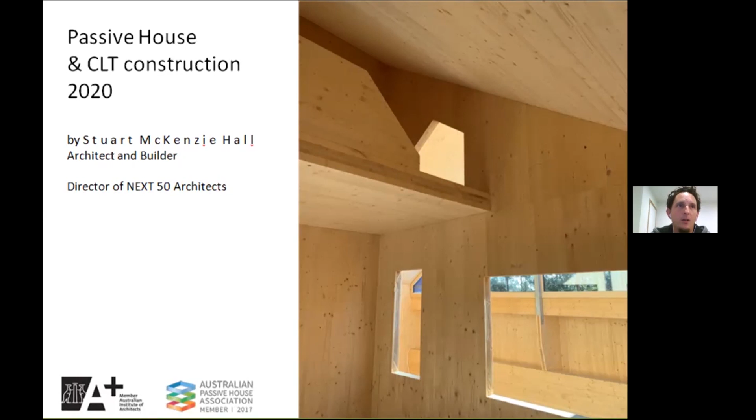So we are living in the 6th mass extinction. It's been referred to as the Holocene or the Anthropocene extinction. And that means that the background extinction rate, the normal extinction rate, is exceeded significantly. And the estimates range from 100 to 10,000 times the background extinction rate. And that's how we know scientifically that we're in the middle of an extinction event. And this is caused by human activity on this planet.

Here are the other 5 extinction events. Sorry for the doom and gloom, but I think it's important to set this context. I'm going to do it fairly briefly. So about 440 million years ago, 85% of all species were made extinct during that event. And you can see the diagrammatic way that the Earth looked in these different eras.

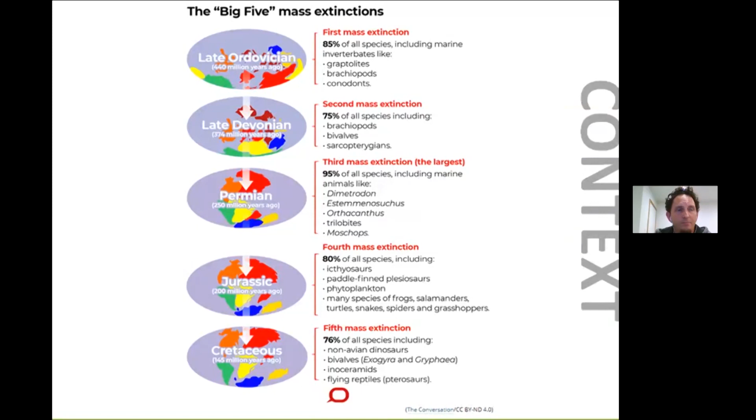145 million years ago was the 5th, 76% of all species were made extinct. So these are pretty massive events. And the fact that we're in the middle of one is worrying, to say the least. And the climate breakdown is just a part of that, a major part of it. But nonetheless, it's also related to human activity.

So putting Australia in that context, it has one of the worst recent extinction records of any continent. So more than 100 species of vertebrates since first people arrived here over 50,000 years ago. This isn't a quote, but I suspect that the majority of the extinction that's happened on the Australian continent would have happened since colonialist times. I'm pretty sure that Indigenous people would have had much more respect for the land than we do. So now we're looking at 300 animal and 1,000 plant species that are considered threatened with imminent extinction.

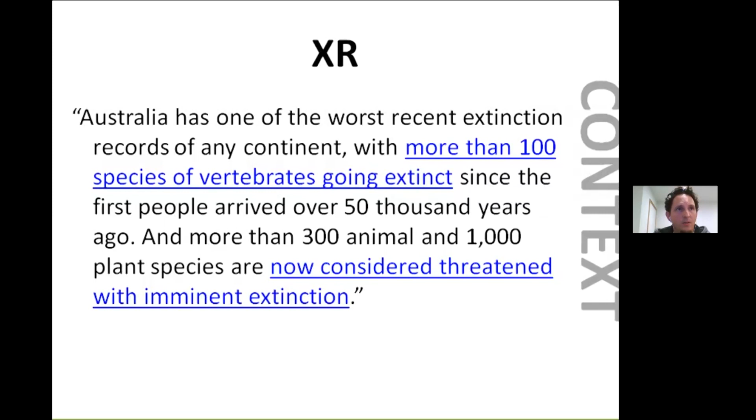So what are we going to do about all of this? This is where we're starting to get towards the end of the context discussion. This is only one aspect of the discussion, but I think this is a fascinating book, edited by Paul Hawken. If you haven't seen this before, I recommend looking at it. Drawdown, as the title suggests, is a very comprehensive plan.

And it's not a plan about theoretical ideas of what would happen if some new magic technology was invented that allowed us to use clean coal or something. This is just about scientific data on things that we're able to do right now, and then it's ranked 1 to 80 in order of efficacy. And this is important because it puts what we do with buildings and efficiency in overall context.

So I've made a quick snapshot of the top 10, and then some other interesting ones where they fit in the 1 to 80. And then these are the category totals. So let's have a quick look at these because it's quite interesting. So the number 1 individual item is just management of refrigerants. It sounds really boring, it hardly gets any media attention, but it's a very significant reduction.

These reductions, by the way, are based on the current data. For example, if we continue to roll onshore wind turbines out at the current rate, allowing some moderate scaling, we'll save 84.6 gigatons by 2050. Refrigerant management, because it has such a huge global warming potential, 89.

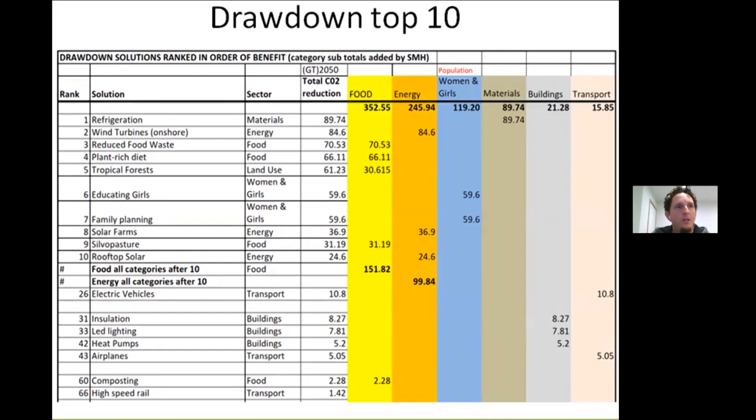So the whole of Australian suburban building systems are set up as systems. Brick veneer buildings are very much the product of an industrialized system. They don't happen inside a factory, they're not strictly prefabrication, but they are systems of a predetermined way of doing things. They're done en masse for efficiency, hence everything looks the same, which I'm not suggesting is a good thing.

But it is something that we need to be aware of when we're talking about prefabrication and the impacts that can have. I guess the other obvious analogy would be the car industry. We don't get to have bespoke vehicles, we get to select from a range that a given manufacturer would make. So if we're moving away from standard building practices and talking about CLT and passive house buildings, one of the first questions is, why timber?

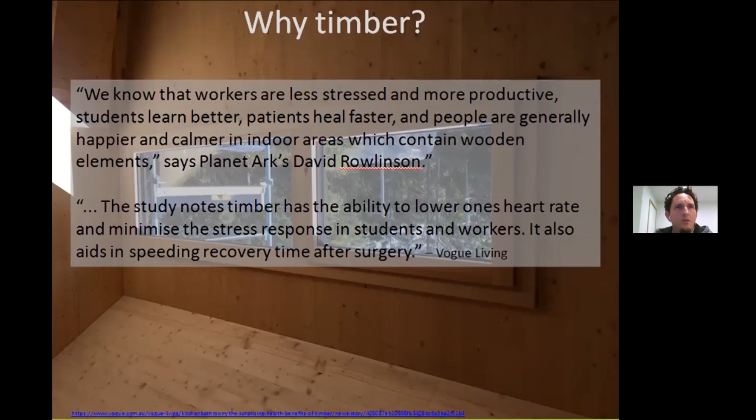And I think Passive House ties in with this quite well because there are health benefits from building a passive house, which I'm going to touch on quite a few of them tonight. So why CLT, why passive house? I'm going to use New Zealand as a little bit of a case study. There's a resource here which is excellent called Passive House for New Zealand, The Warm Healthy Homes We Need by Jason Quinn. It's a 2019 publication.

New Zealand had a problem that it identified quite some time ago, which, among other things, costs 6.16 billion a year in public and private costs because of respiratory illnesses. Respiratory illnesses caused by what was referred to as the leaky building syndrome, just generally poor quality building. So New Zealand's been a bit of a test case. The homes are cold, so the average New Zealand home is 16 degrees C during winter, which is the temperature at which respiratory illness increases, or the risk of it. At less than 12 degrees, there's a high risk of stroke and heart attacks. Now, in this study, 12 degrees and less was found inside bedrooms, typically.

The WHO, the World Health Organization guidelines call for an indoor temperature of at least 18 to 21 Celsius, particularly if babies and elderly are resident. And this is a mind-blowing statistic. 1/3 of New Zealand homes contain mold. A lot of these problems are addressed by Passive House and Passive House systems, and I'll go into that as we go through.

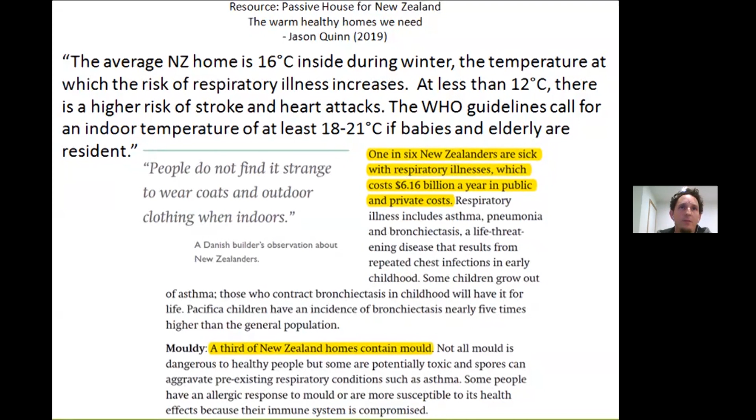Pretty much, if you visit a CLT factory, as I've done in the XLAM factory here in Albury-Wodonga on the mainland, which is pretty much a brand new facility, the timber goes in one end of the factory as a pack of pine, and it's processed almost entirely in an automated way and comes out as a fully cut and finished CLT panel at the other end without a human hand touching it. It's very fast, it's very efficient. Talk about that a bit later.

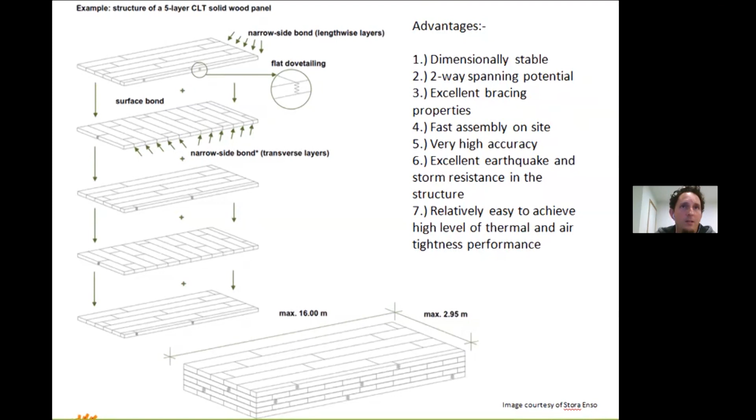So that's one of the exciting places that CLT can be advantageous. So obviously in a setting like New Zealand, it's also super useful. Not so much an issue in Australia, but just worth noting about the material itself. So that's a little bit about CLT. Let's flick back to Passivhaus. I'm going to go back and forth a little bit as we go through, just so you can see kind of the relation between the two things.

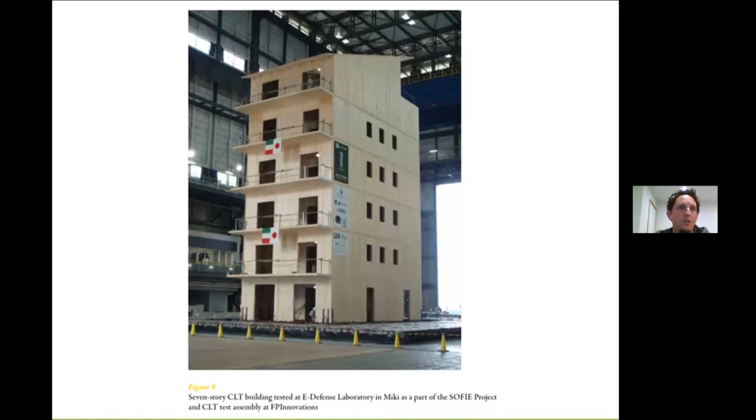So there's a bit of an overview of what Passivhaus is. And I note from the poll at the beginning, I'm pretty much preaching to the choir tonight. So a lot of people either have some knowledge of Passivhaus or are Passivhaus professionals. I apologise if I'm going over basics that people already know, but I'm trying to appeal to the widest audience possible. And I'm not going to make any assumptions with that.

So Passivhaus started in 1991. Today there are over 60,000 homes that have been built to the Passivhaus standard, and many over and above that have attempted to but are not certified. So it's not a brand new idea. This is something that's been tried and tested. It's been tested in a lot of different climates.

And essentially what it comes down to: using modelling and climate data and careful design, there's a requirement to reduce the heating and cooling total energy demand to 15 kilowatt hours for every metre squared of the building internal per year. So I'll talk about what that means in a minute in terms of actual heating costs, but it's very low. Somewhere between 80 and 90% less heating and cooling energy than a normal building.

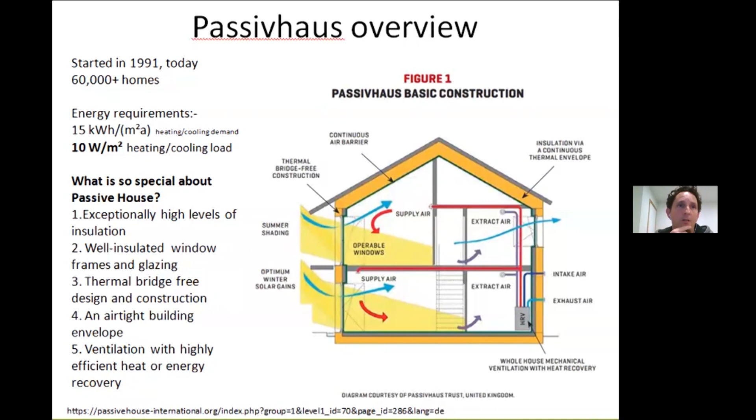And it uses a very low amount of energy, and it means that you don't have to open windows in the middle of winter. So it adds a lot to the energy efficiency. Another image of basically the same thing, diagrammatically showing the air intake and the stale air exhaust, the heat exchanger unit, supplying warm, fresh air, extracting stale air from the kitchen and from the bathrooms.

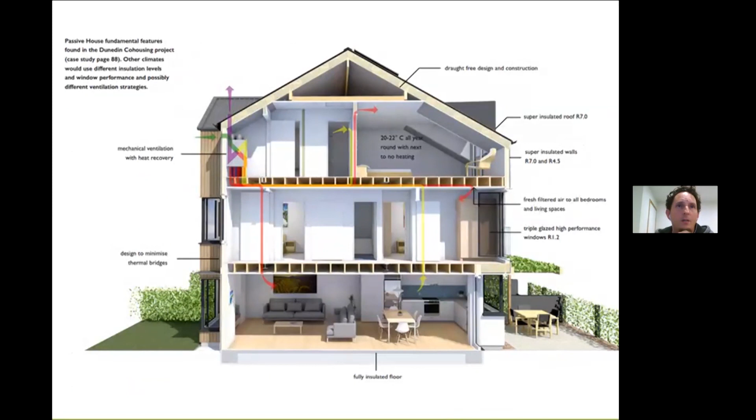So just going over some myths. Australia is too warm and Passivhaus is overkill for our climate. So this is a myth for a number of reasons. Firstly, Passivhaus is customized to the local climate. So the climate data for the specific area that you're building in, the specific altitude, is optimized and it's designed into the building at the design stage. So it's not a one size fits all system.

A building in the middle of Siberia is going to have much more energy requirements to meet Passivhaus: thicker insulation, higher performance windows, more of a reliance on thermal separation of the floor slab, and all these details will be different in a house in Siberia to a house in Victoria or Canberra. They'll share some things in common, but they'll still be different.

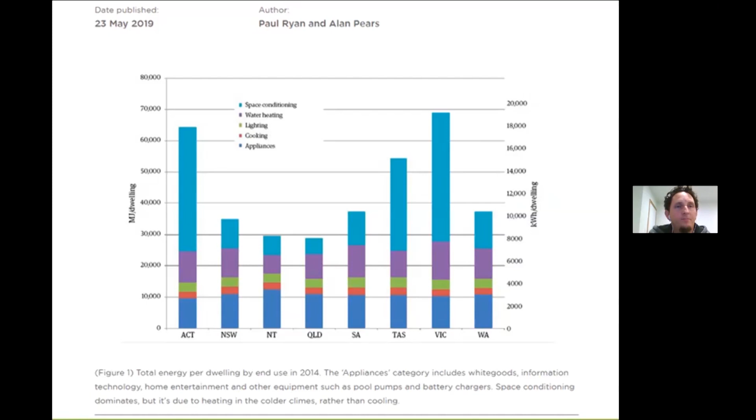So I'm going to move into the case study. This is the first passive house we did, passive house with CLT, or using passive house principles. It's not certified, but we went through the same process, which is a bit different to the case study I'm going to look at tonight. I only show this because I think you learn things from doing things previously and then trying to incorporate the learning from this first example into the next build.

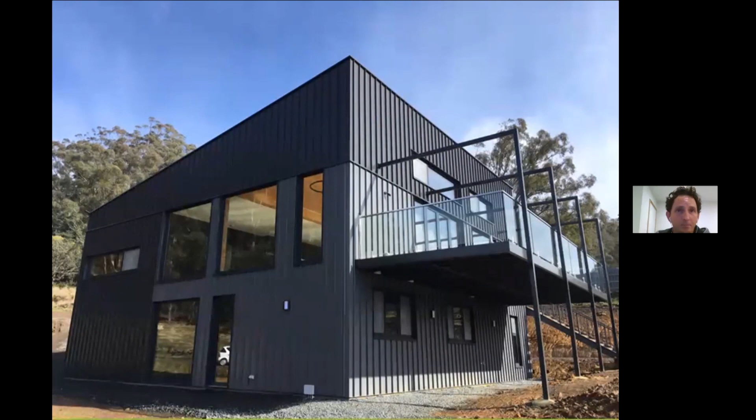So this is the interior of a passive house made from CLT in Hobart. Not a certified passive house, but built on those principles. This is the exterior. It's got metal cladding. Now I'm going to dive into the case study for tonight. So this is a shot from a couple of weeks ago with the build. I'm going to show you what it actually looks like finished in a CAD model. So this is the design intent.

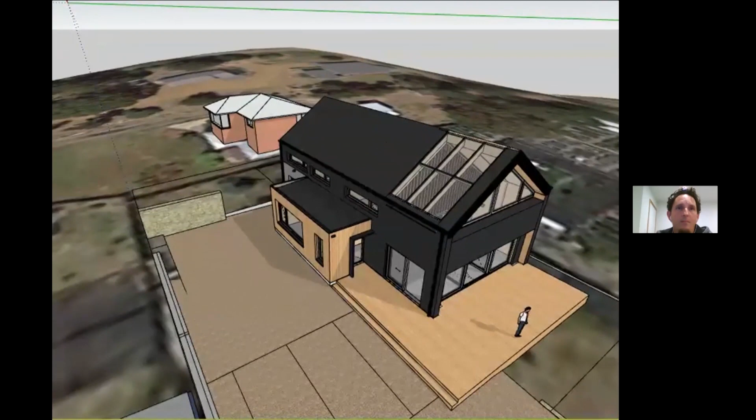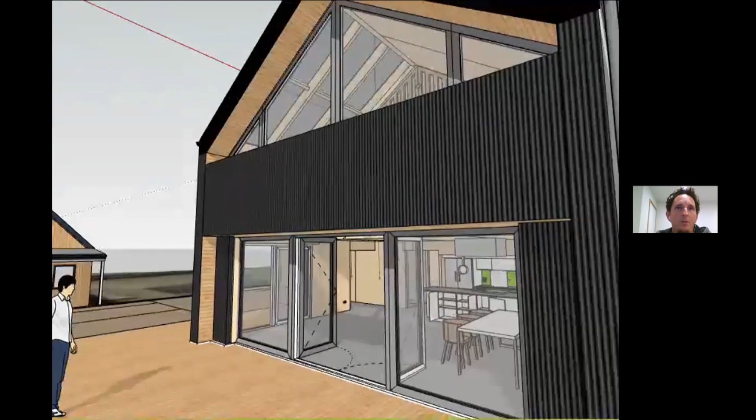This is the northern elevation we're looking at here. So it's got a fair amount of glazing on the north. And what you'll see there is a bit of an eave overhang that's kind of optimized for Tasmania to cut out that high level summer sun. Same on the bottom, so it's actually a box built into the cladding. So typical passive solar design features. Because of the block running north-south, it's actually a long building on its long axis, so obviously some of these back rooms don't get the direct northern sun. So to try and get a bit more light deeper into the building, we've got a fairly big roof light.

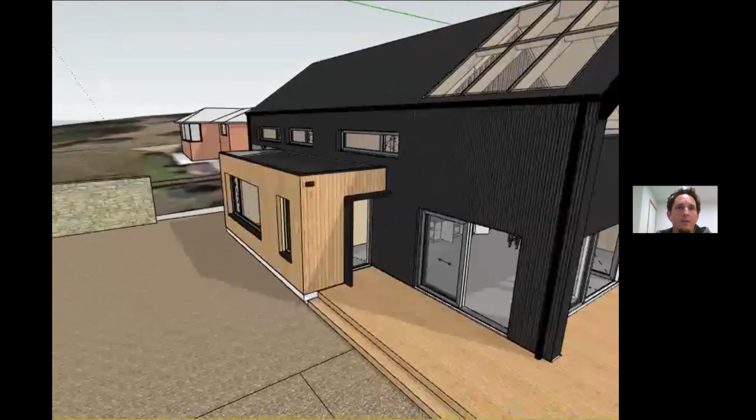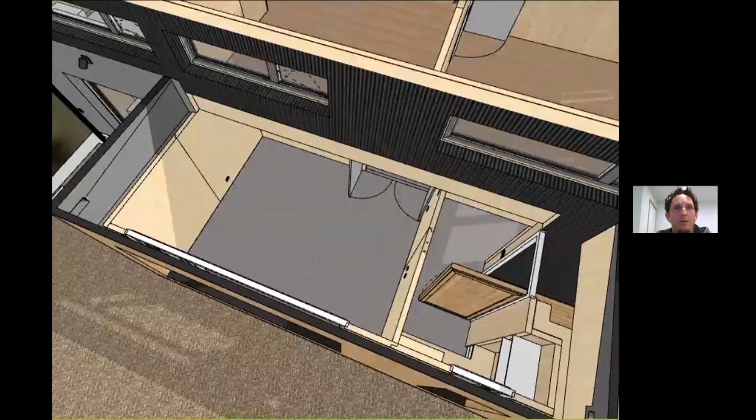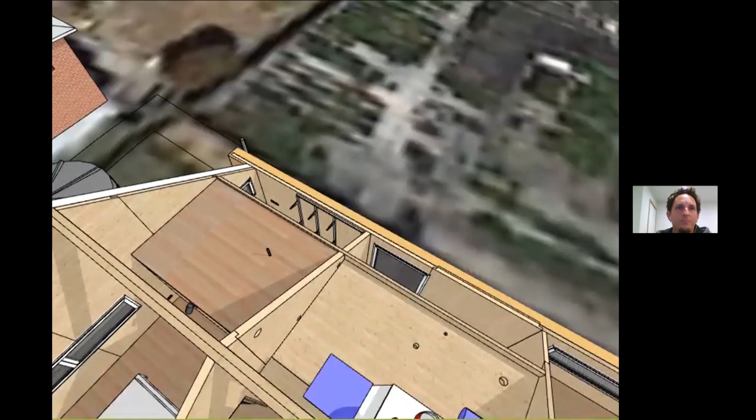And I'll show you internally what's going on so you get a bit more of an idea of the building. So there's a void here over the living dining space. There's a little entry lobby here. I'll go to the downstairs in a second. Coming up the stairs, there's a second living upstairs, which is kind of a sewing craft room. There's a master bedroom here, which has an ensuite underneath this little loft area and a walk-in robe. And there are two kids' bedrooms that have built-in bunk beds that are made in the CLT.

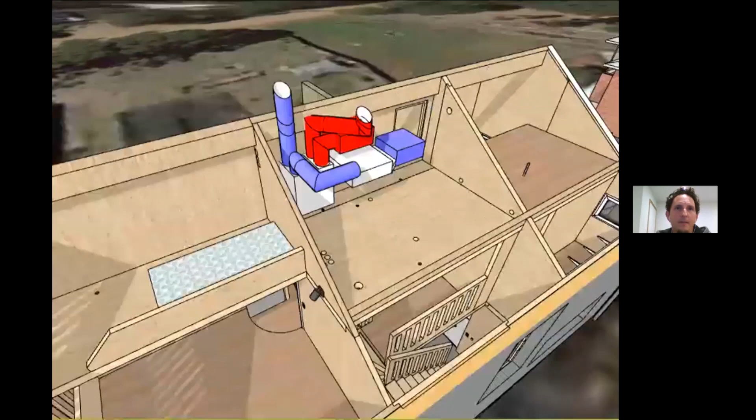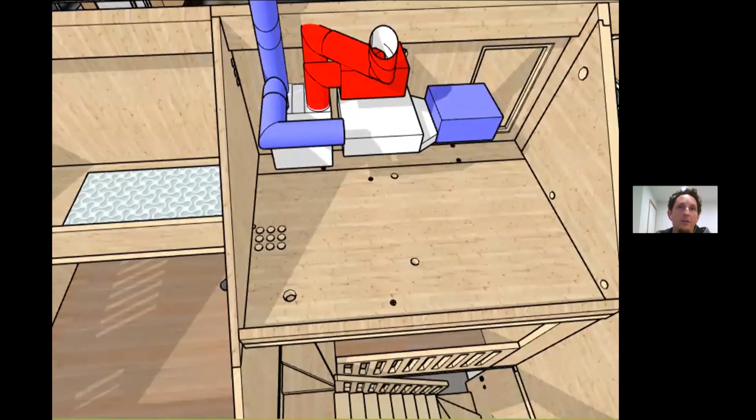So I haven't showed all the joinery in this system, but one of the reasons I'm showing you this part of the model is there's a mechanical room up here with the HRV system pre-located in it. And you can see all of these little openings in the CLT, which are predetermined. So there's predetermined downlight holes, there's predetermined openings in the CLT for the HRV. These are cut in the factory on the CNC machines. They're very accurate, and it means that we don't have to do hardly any processing on site.

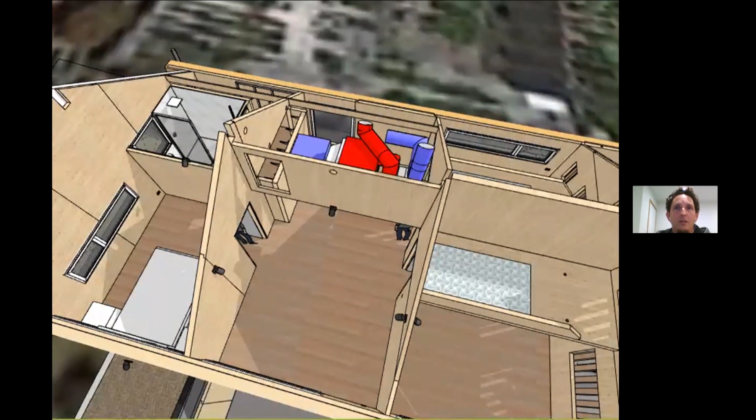So I'm just going to switch off the ceiling zone. So it shows you a bathroom, walk-in robe. So there's 3 bedrooms up here with the ensuite. Switch off that first floor so we can see what's going on downstairs. And downstairs we have the open plan kitchen, living, dining. There's a second living space, 4th bedroom, which is for an elderly parent, and the main bathroom, laundry, pantry area, and then the stairs up.

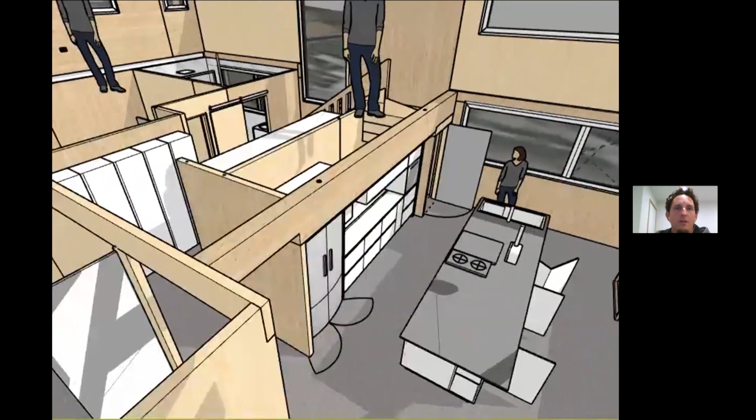Now, that's a fairly large house, but it's sort of similar to the Australian average of about 230 square meters. I think this is a bit bigger than that. It's about 280. Don't quote me on the exact square meterage. I'll have to check that.

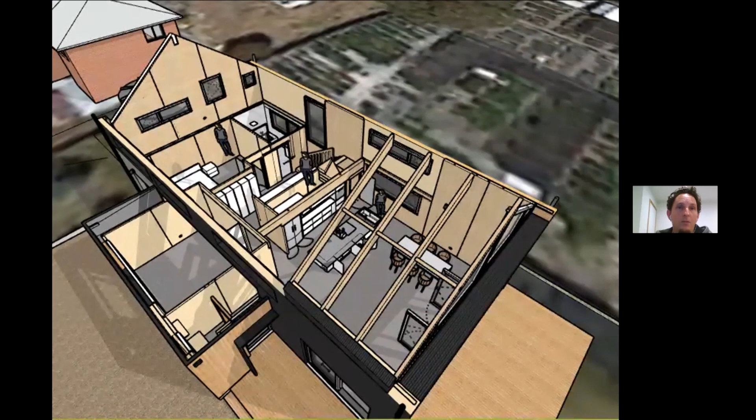But I want to show you, that was really just to give you an idea of the building, what it looks like, how the spaces are arranged, so that when you see some of the images, it'll make a little bit more sense what we've achieved with the CLT. So that gives you a bit of an overview of the building.

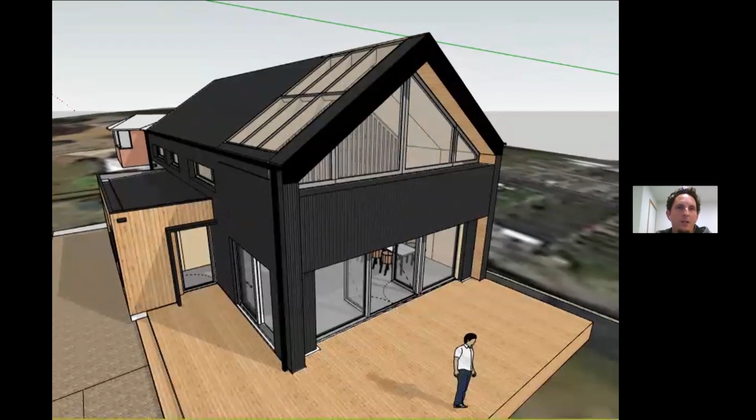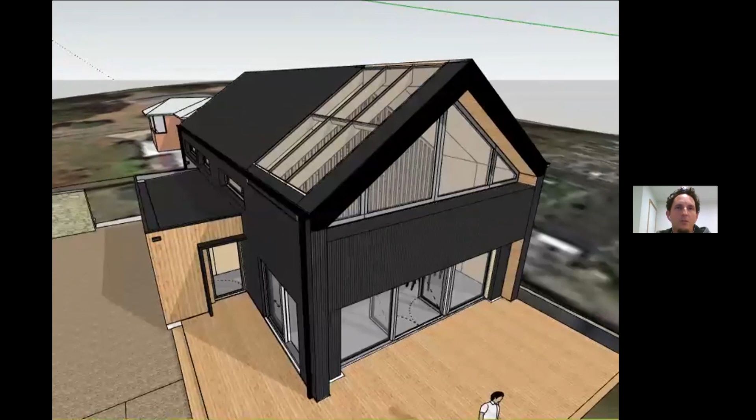So this is designed and then modelled in the Passivhaus planning package, as well as the energy rating software. A lot of the things are optimised in that process. So we look at things like we needed to add a sun protect coating to the glass in this roof, because we're getting a little bit of overheating when we were modelling it in the summer. And Passivhaus allows for some overheating, but it's to a limited degree. So there are the sort of feedback loops that you get from doing the modelling early in the build.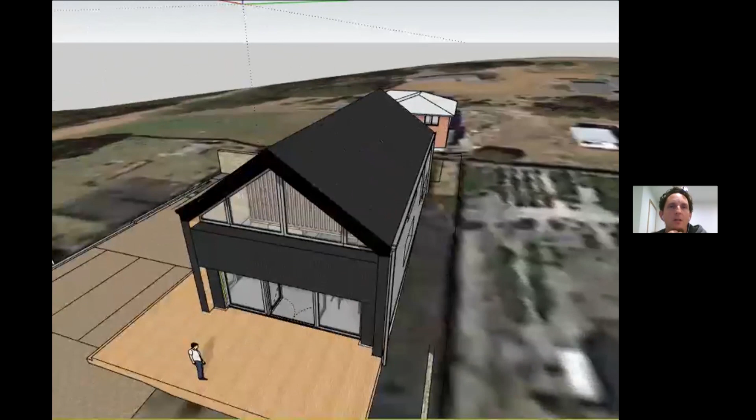Some of that feedback that comes through the Passivhaus planning package modelling is much more specific than what you get from the energy rating software feedback. You do get some useful things out of the energy rating process, the star rating process that's mandatory, but that also depends a little bit on your consultant. The consultant we have is very experienced and is able to interrogate that star rating model in quite a useful way.

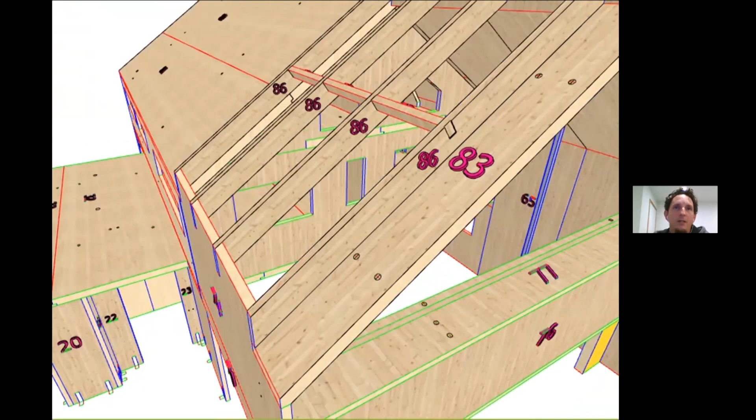So now that's the finished building. The CLT skeleton underneath it is basically like this. So as we design the building, each panel has a sequence number so that we know in what order those panels go up. That's all planned from the beginning. The lifting points are planned into the panel. Things like recesses for these purlins or cross purlins.

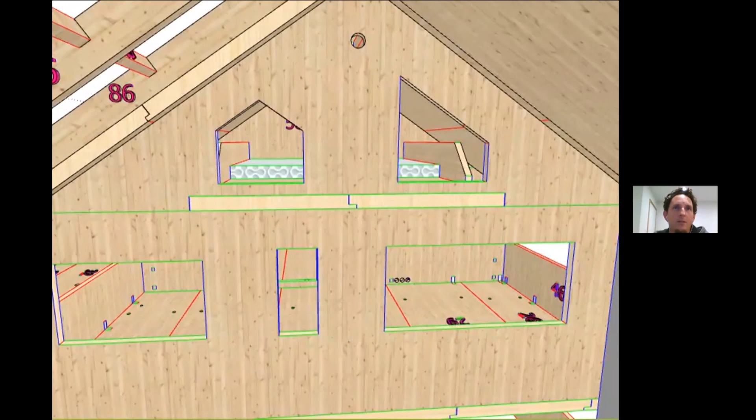A lot of detail goes into this phase, including, as I was mentioning, the integration of CLT HRV holes for the HRV system. So that's an extract point. Obviously, we're going to have a lot of heat in the top of the void space here. The heat's going to rise to the top of the space. It's going to be extracted from this point and then distributed more evenly through the house.

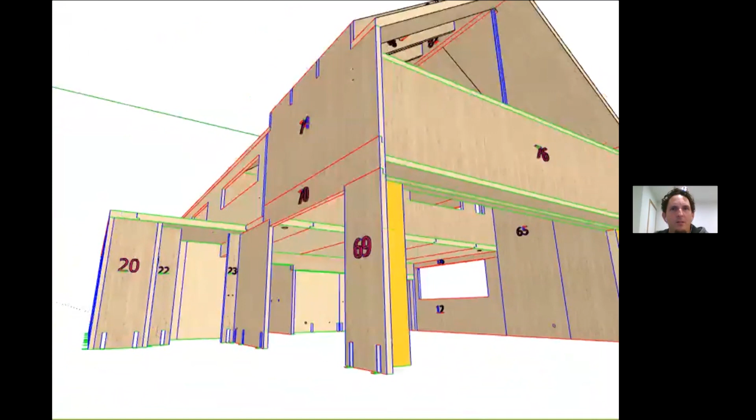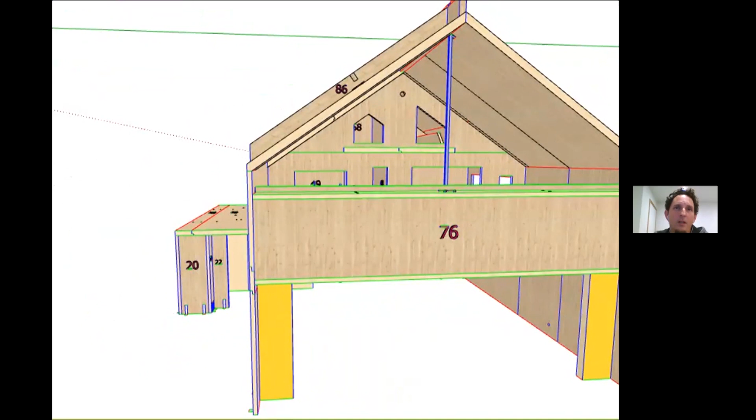The other thing that's done in the CLT model is outlets, so electrical points, some holes for plumbing and a few other details, so that when this turns up to site, the building, once it's erected to this point, the structure is complete. Also, all of the internal linings are complete. So with the exception of the floor finishes, the ceilings are CLT, the wall finishes are CLT, and there's no more work to be done then other than painting.

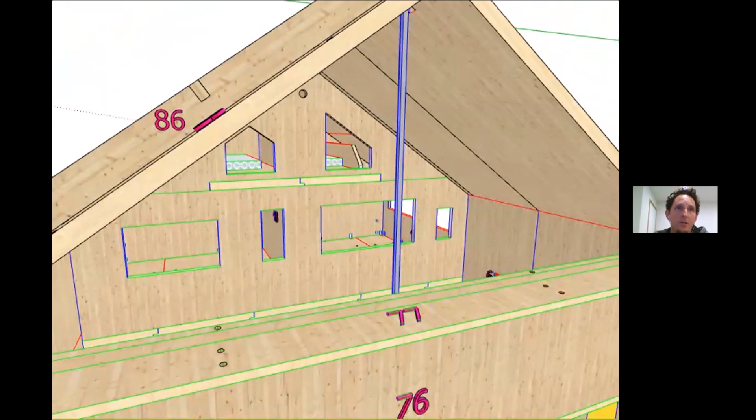So all of the panels on a CLT project are lifted into place by crane. The weight of a timber panel like that is about a quarter of the weight of concrete, so you get away with a much smaller crane, but it's still a crane-dependent process. But the reality is that means this wall goes into place pretty quickly and efficiently and accurately. Once it's fixed off, it's pretty much millimetre perfect.

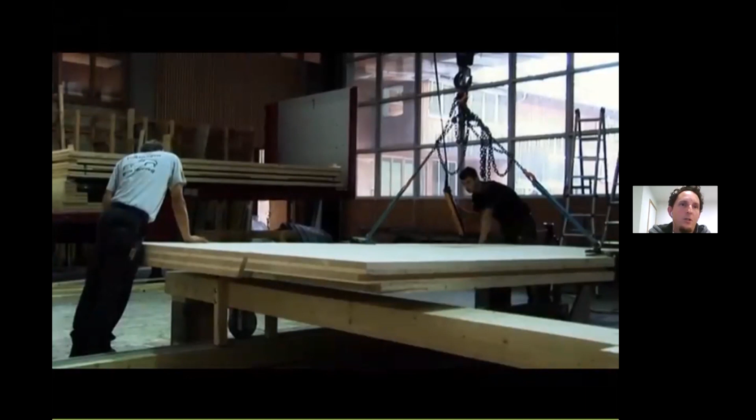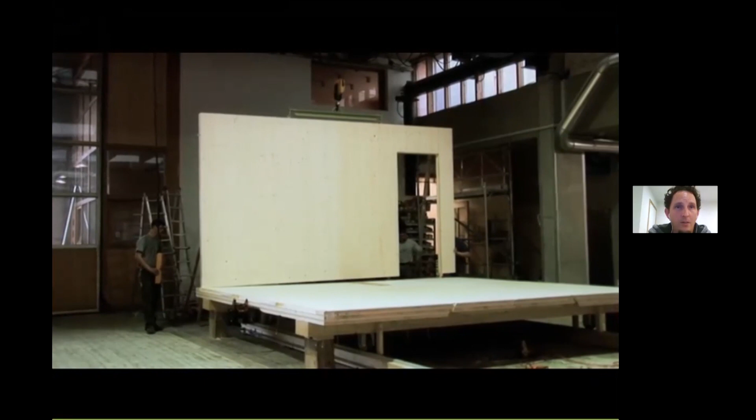That's that panel in position. So I'm going to show you another very brief section of a video, just watching a CLT. This is a CLT module that's being put together in a prefabrication facility. This is not done on site. There's the CLT, sort of a diagrammatic explanation of CLT, the different lamellas in the different directions. They're putting screws into the panels, which is how they're fixed together.

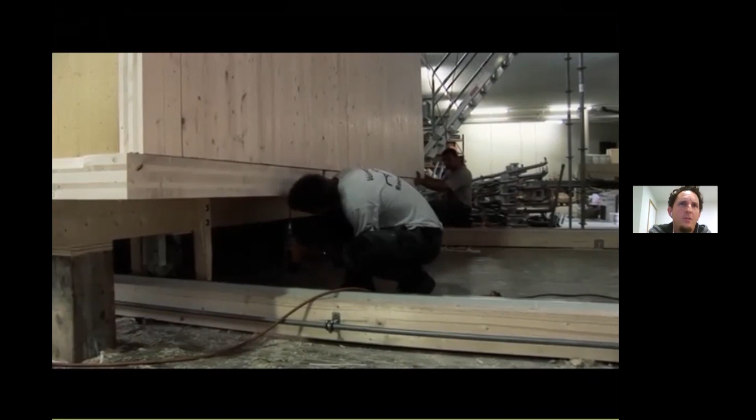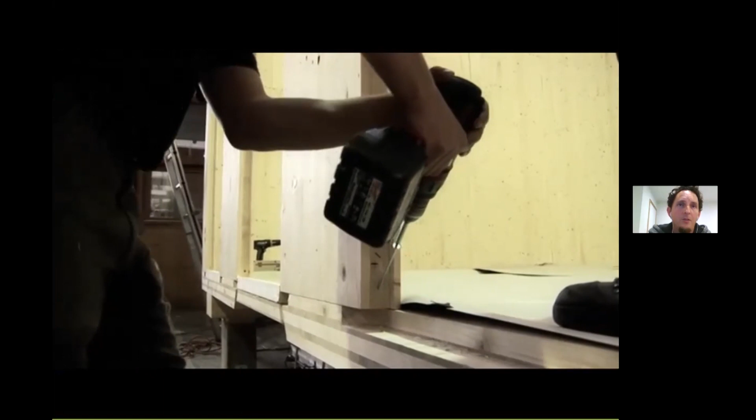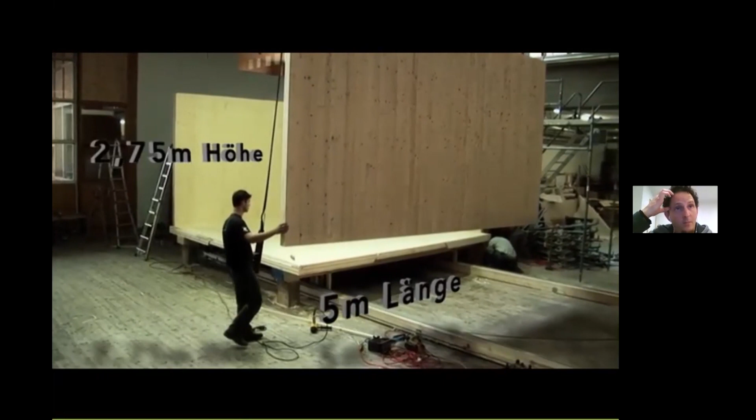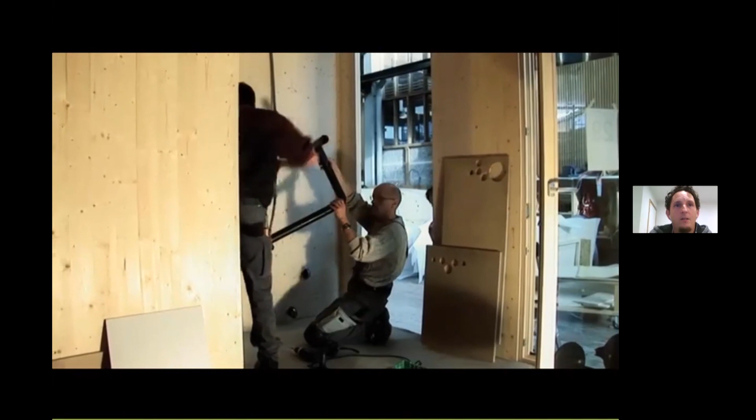This is from a 500 bedroom hotel in a pretty harsh climate in Germany. That was not just made in CLT in the factory, but then the pods were pretty much completely finished, so that when they were taken to site, they were already fitted out. A little bit different to what we're doing, but I just wanted to show you that because it gives you an idea of, that's then putting in electrical cables, pretty much how quickly it goes together. They've done the same thing that we had with predetermined electrical points and fixture points.

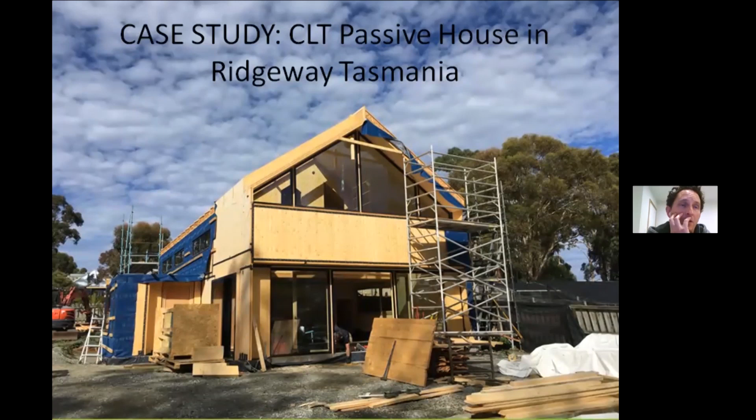So going back to our case study then, you can see now an image of the building as it's under construction. It's still under construction at the moment, but I want to show you some interesting shots later into how it's developed. That's inside that void space. This is the pop-out box here I was talking about that provides the shading. These are German triple glazed windows.

So part of that Passivhaus building envelope is to have very energy efficient windows and doors. And these are timber frame with an aluminium cladding on the exterior, triple glazed with a very good U value, and a triple glazed skylight. But you can see the CLT even includes the rafters, it's all housed in, all of that work is done. So you have a very finished building very quickly.

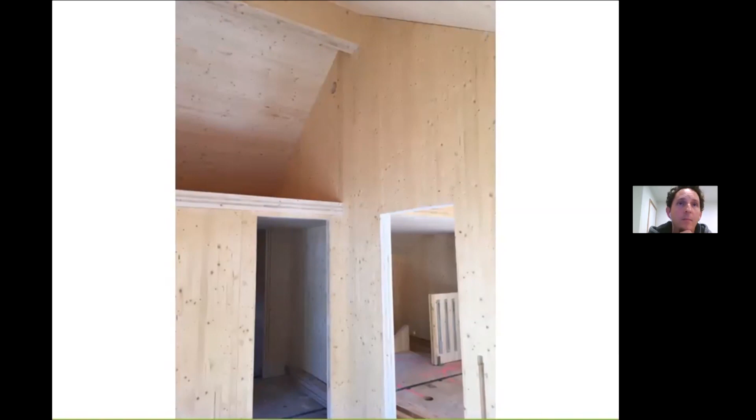This is one of the upstairs bedroom areas. So this is actually the master bedroom, and this is a little loft up here. You can see the hole there for the HRV system. You can also see in the background through in the other room, there is a balustrade which already has some slots cut in. This is all done on the CNC machine as well, done in CLT. And you can see the brackets that tie it down. I'll show you how these are hidden a bit later on.

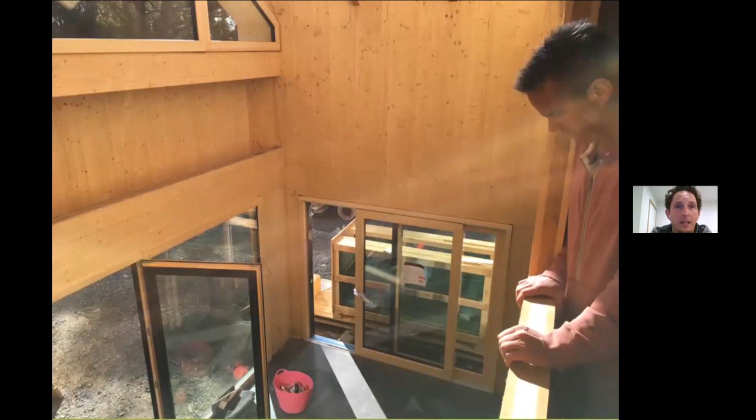This is Justin O'Connor, the builder, in the void looking down. This is a slab on ground. I'll show you the details of that later. It's a completely thermally isolated slab, dark in color and polished so that it absorbs the heat from the sun.

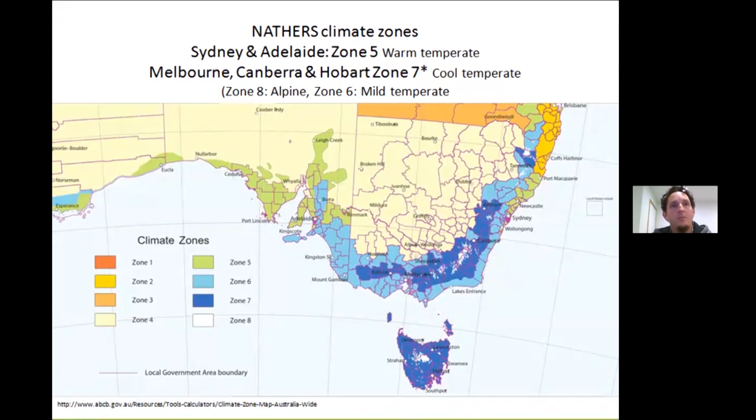So just very quickly, I'm going to do a very slight digression onto the climate zone. So you see these dark blue and light blue areas all through southeastern Australia and Tasmania. These are all cool temperate, mild temperate zones, and it's even fairly far up into New South Wales. These are all areas where we benefit from Passivhaus, and Passivhaus can also be used in hot climates. So they build them in the Middle East. So just because it's a hot climate doesn't mean you can't benefit from a thermally controlled envelope.

In Hobart, during winter, overnight temperatures can drop as low as 3. We're in a microclimate in Ridgeway, so we're up at about 350 meters, I think. So that takes another 2 degrees off, so you're getting overnight temperatures of close to 0. And depending on microclimates, you'll have areas where you'll definitely get frost.

So I just want to talk a little bit more about a review of the standard and what we're talking about, and then I'll go into the specifics. So one of the important things here, air tightness, 0.6 air changes per hour, pressurized at 50 pascals. I'm going to go into that a little bit more.

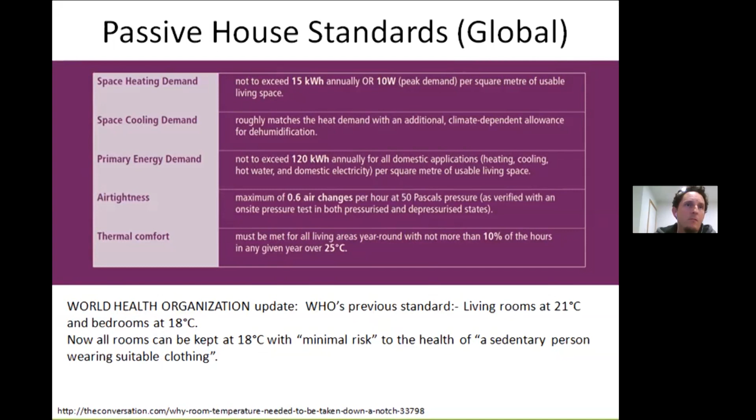I'm definitely anticipating that there'll be some questions about Passivhaus costs. So this is just one reference I found, 5 to 10% more to build than a conventional equivalent, which is quickly offset by the dramatically lower running costs.

We're finding in an architectural build, this building for example that we're looking at in the case study, is actually not more expensive than an equivalent architectural building that would be bespoke, designed by an architect, built in the same city with none of the provisions of Passivhaus. So in some cases it's cheaper, because a high spec build with high finishes will be more expensive than this building.

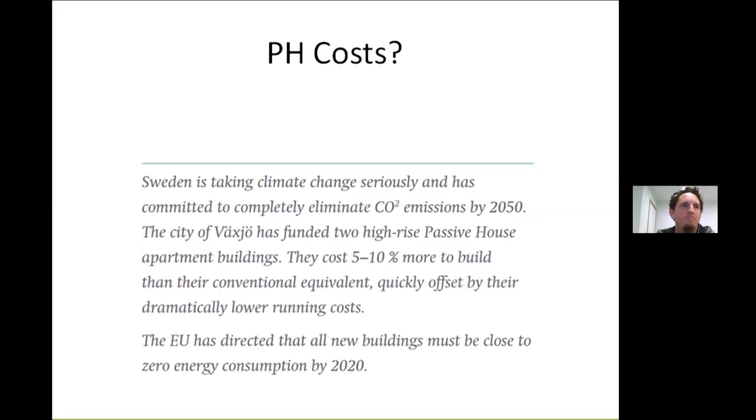So part of what offsets cost, obviously, is that you keep that heating below the magic 15 kilowatt hours per meter squared per annum. So these are your losses, these are your gains. If they equal out, then you're doing pretty well. So you get a balance. So you're going to get a significant amount of loss just through the building envelope.

You're going to get a very large amount of losses through the windows and doors. And then you're going to get some ventilation losses. And these are mitigated a bit by the use of a heat recovery ventilation system, as I mentioned. So that's your losses. In your gains, you're going to have some gains from heating, but you're going to keep those below that limit. And I'll talk about some anecdotal evidence with heating now, actually. So the house that I live in is designed to the Passivhaus standard.

It doesn't face the right way because of the peculiarities of the site. And if I work out my house at 15 kilowatt hours per meter squared per annum, it comes up to allowing me running a small 1.8 kilowatt heater, just a tiny little fan heater. That would allow me to run that heater for almost 2,000 hours in a year.

Well, anecdotally, I would say I would run it between 100 and 200 hours maximum. So it's significantly less than this 15 kilowatt hour requirement, and it's still a very comfortable house. And that's about $50 of heating energy for a whole year, which is nothing.

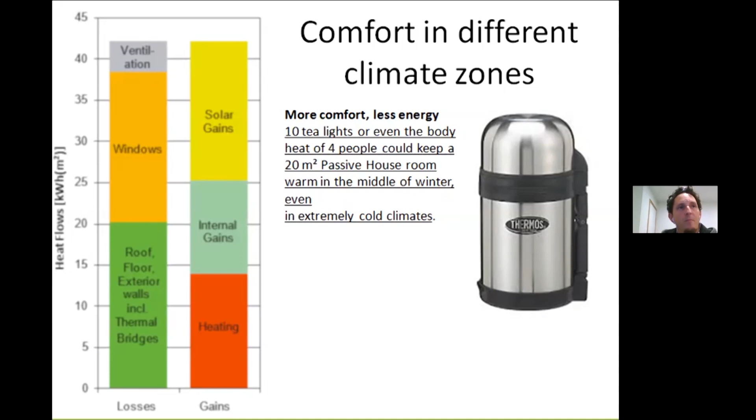So we're going to talk a little bit more about the Passivhaus planning package, PHPP. So whenever you want to design a Passivhaus, you have to use this modeling software, and you input all of the specifics, the climate specifics, the shape and geometry of the building, and then all of the specifics around the glazing installation and the values of the insulation, etc. It's very detailed.

And then it gives you some interactive data where you can play with, for example, increasing or decreasing your shading to optimize the heating and cooling loads. You can look at playing with your ventilation rates. There's all sorts of things that you can do. But this is how we locally adapt to the specific site and climate that we're designing for.

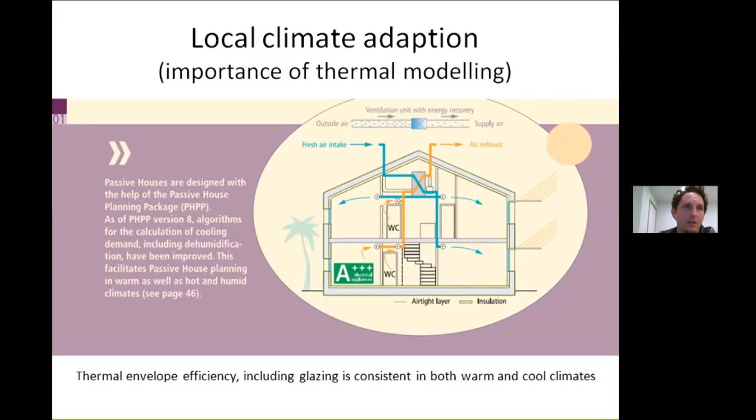So looking at air tightness as one of those key ways of achieving this great thermal efficiency. This is an example of a pressure test or a blower door test. We have to achieve 0.6 or around about half an air change per hour at 50 pascals. So 0.6 and less meets the Passivhaus standard.

To give you an example of what that means comparatively, an average house in Australia, if it's really well built and a new build, it might get 5 air changes per hour, and there are plenty that have 20 air changes and above. The general standard of air tightness in Australia is shockingly bad. It's just not really considered.

So this is a pressure test that you see here. So essentially they open a door, through the front door or wherever, insert this blower door test mechanism, which is pretty much just canvas on a frame with a fan that's calibrated to some pressure testing software and devices in the laptop to give you a readout. And I'll show you the result that we got with our CLT house.

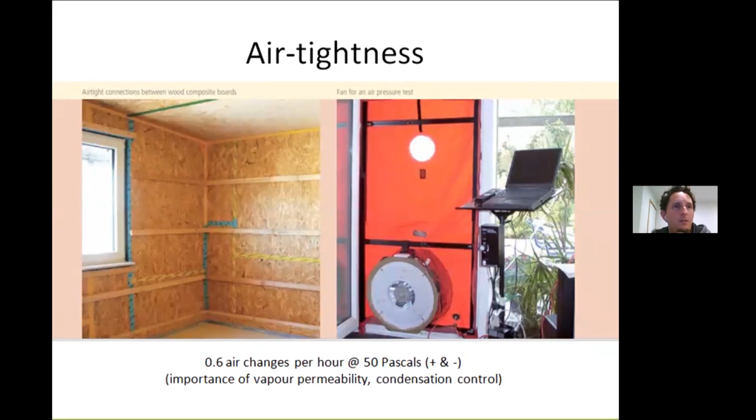So the N50 refers to the 50 pascals. It's both pressurized and depressurized, and then there's a whole heap of readings that have to happen till that is calculated. It's based on the volume of the air in the house, and there's a lot of detail that goes into setting up this. So we achieved 0.17, which is a very, very airtight building.

When I say we, I really mean Justin O'Connor, the builder. He's had prior experience in Passivhaus. He's a certified Passivhaus tradesperson and consultant. He knows a lot about the field. He was very nervous about this particular test because he'd never done a CLT house before, but he'd done other buildings with blower door tests and with air tightness, air leakage control layers. And CLT doesn't have a typical air leakage control layer, which I'll talk about in a sec.

I've been talking for about 50 minutes. I'm going to be wrapping this up pretty soon and opening up to a panel discussion, but I'm just going to try and get a little bit more detail in the end of this discussion so we understand some of these points in a bit more detail.

So right after this test was completed, this was a preliminary test. This was without a roof or cladding on it. It's just the CLT up. It was wrapped and taped. The windows were installed and taped. And then he achieved this phenomenal preliminary result.

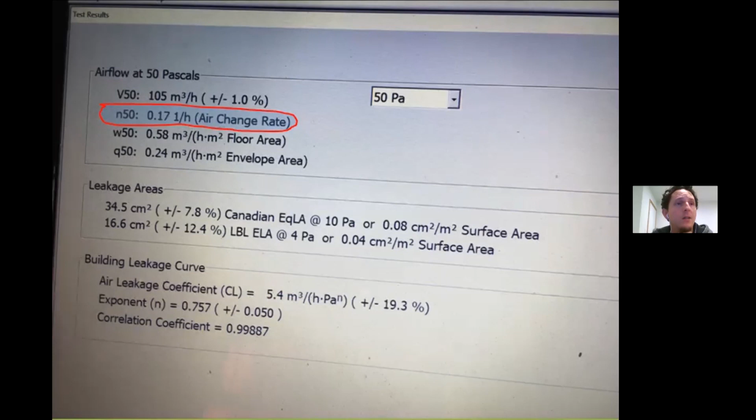How is that achieved? So there are some details here. I'm going to start from the bottom and just go around the building. This is the slab on ground. It's quite thick because there's no footing. There's some special slab prep. So the dispersive soil was removed, FCR was packed down and tested for compactness and made very flat.

And then we've got extruded polystyrene foam, well, not a high density, but a high strength foam rated to 300 kPa, so it can support a slab and building load. So there's literally no ties anywhere to the ground. This slab is completely encased in a thermally efficient insulation. It's 50 mil under, and I think we actually used 50 mil PIR on the edge in the end because it had a high enough R value.

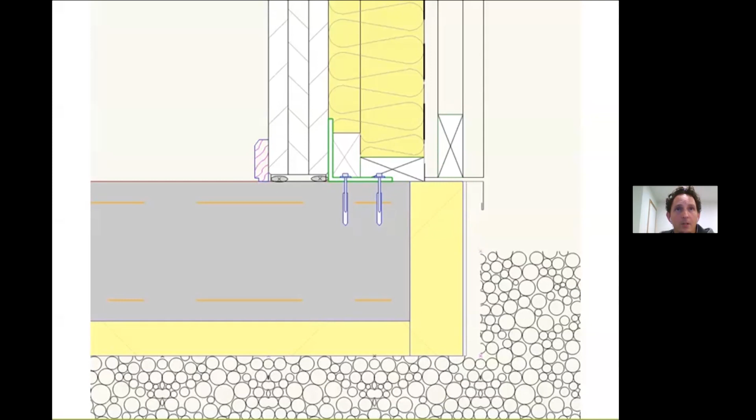And then this is the insulation zone. There's some service cavity in here, but it's also in the insulation zone. So we've got about 135 mil of insulation with a zone where services can run and still have at least 90 mil of continuous insulation. There's a membrane, which is a weather tightness layer, a rear ventilation cavity, batten, and then cladding. So that's the foot of the building, if you like.

As we go up the wall, that insulation layer continues up. We've got our CLT, which is pre-cut to the sizes for these renovation profile triple glazed windows, which have this rebate. So they just fit straight into the hole with the little air tightness tape that was put right here before the window was fitted. They're fixed from the outside, and this little red tape flap is a Pro Clima tape that wraps continuously into the membrane. So once this is fitted in the hole, it's completely finished from the inside. There's no more finishing to do on the reveal.

So technically speaking, there's a small thermal bridge through here, which has been modeled in the Passivhaus Planning Package, but it's still timber, so still pretty well insulated. And there's some expanding foam tapes in here that provide some insulation at these weak points.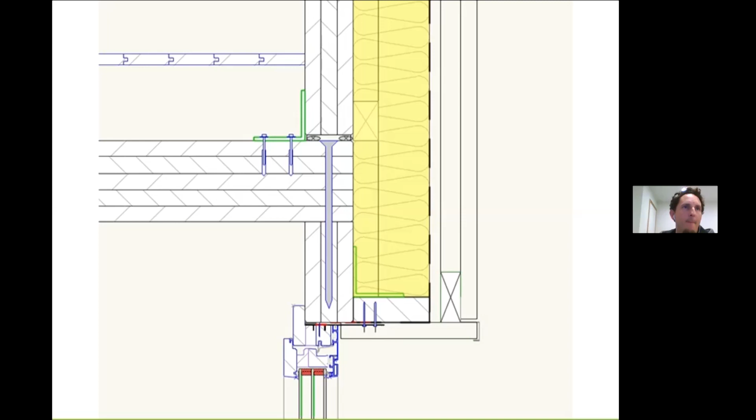This is the junction with the roof. So thick insulation on the roof. I think we had R6 in here. And on average, at the very least, in the weakest point, you get R2.6 in the wall, and you've got about 0.9 R value in the CLT. And then if you have it all entirely insulated, where there are no services, you're getting close to R3 here and about 0.9 there. So pretty high R values all around.

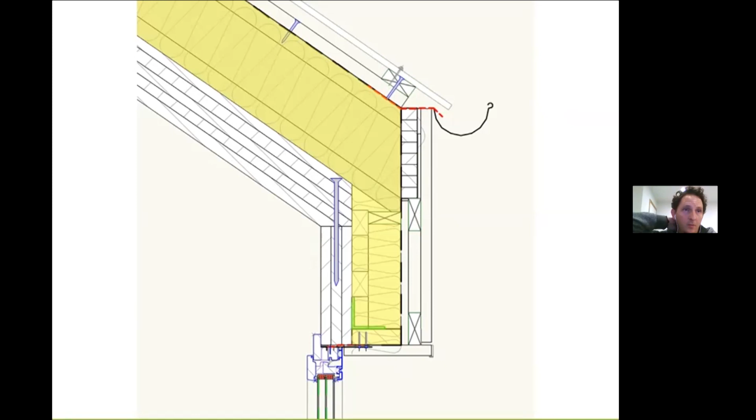Just the CLT alone in the roof at that thickness is over R1, and then you've got your R6, so you've got at least an R7 roof. Rear ventilation cavities again, continuous membrane all the way around, and a little flap into the gutter, which is added later, which is a little bit non-typical in Australian detailing. And then this is the ridge just showing how the insulation continues over. So we used I-joists on top of the CLT just to create a 250 or 240 cavity for the R6 insulation.

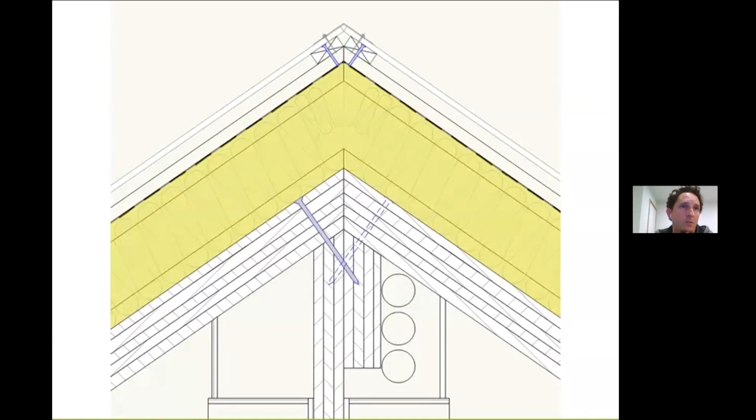So I'm going to wrap up with a couple more images of the building, so some of these details will make sense in a visual sense. But why do we do this? It's because if you do it with the appropriate insulation, thermal breaks and high quality windows, the internal surfaces have a much higher temperature than a normal building. In fact, in a passive house, if the air is 20 degrees inside, none of the surfaces will be more than 4 degrees less than that 20 degrees.

Whereas in a typical standard build, you'll have a cold window, you'll have drafts created by that, increased air leakage rates, so you're going to have radiant losses and convection losses and all sorts of losses that you don't have in a more controlled environment. And all this warmth that's been kept inside in winter is being recycled effectively by the HRV system.

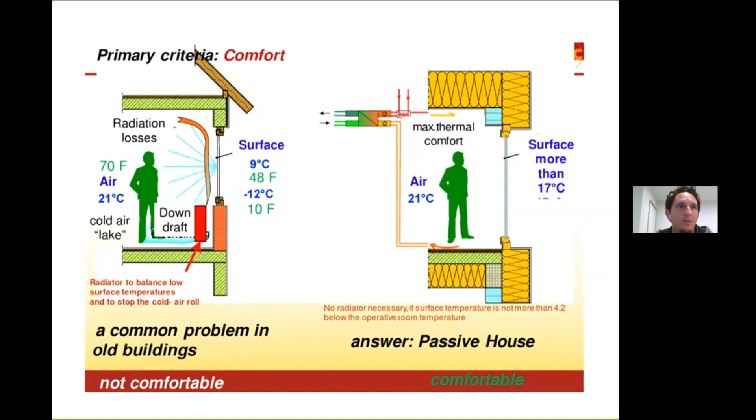This is what it looks like on the roof at this exact same day. So it's got its wrap on. There's the rear ventilation cavity created by these longitudinal battens. Pro Clima wrap with the special tapes underneath, Naideck tape underneath the counter battens. All taped and continuous into the wall membrane.

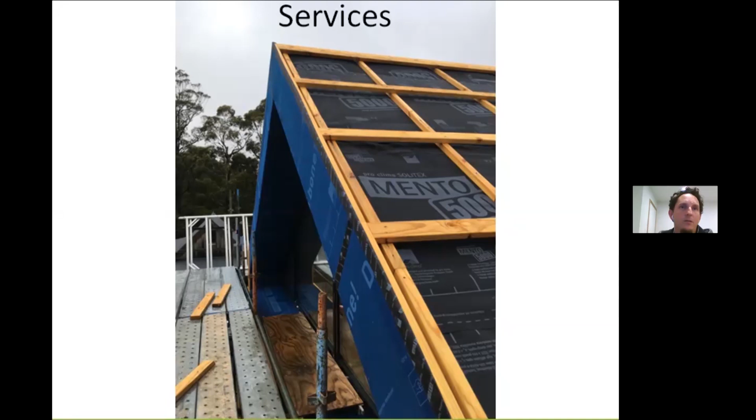At the same time, bathrooms are fully tiled already. Everything's solid too. Everywhere you go, you've got a solid substrate, so you can fix joinery wherever you want. It's super flexible. This is joinery going in. This is just an example of that skylight. It's been flashed and made watertight, ready for the roofer to do the final installation of the roof cladding.

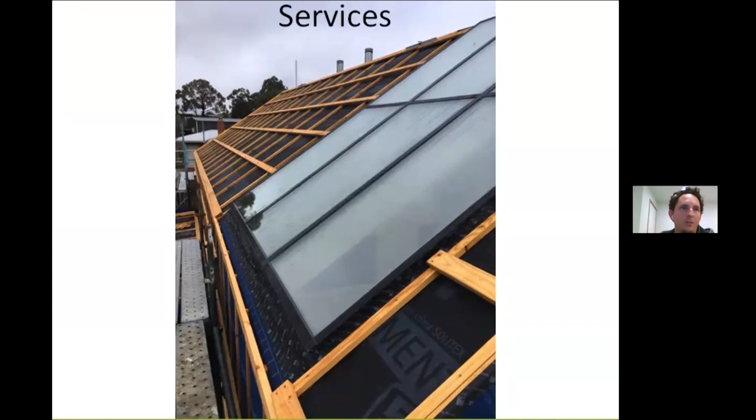This is a bit of a grey, rainy day in Tassie, and you've got a building that's weather tight without actually having any cladding or roofing on, so the guys can work inside. So even on a grey day, you get a lot of natural light. This will have battening, as you probably saw in the model, to cover these different openings from the kids' bedrooms and the bunk beds.

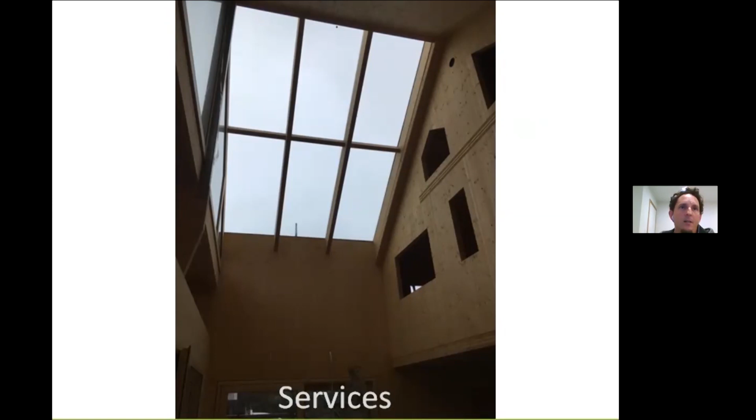So with all of this attention to detail and thermally efficient building, it means that you can have a building where it's 21 Celsius inside and minus 14 outside, and there'll be a nice even temperature distribution in the rooms. And there'll be no condensation on the inside. All the condensation will be on the outside. So this is an example in Hobart.

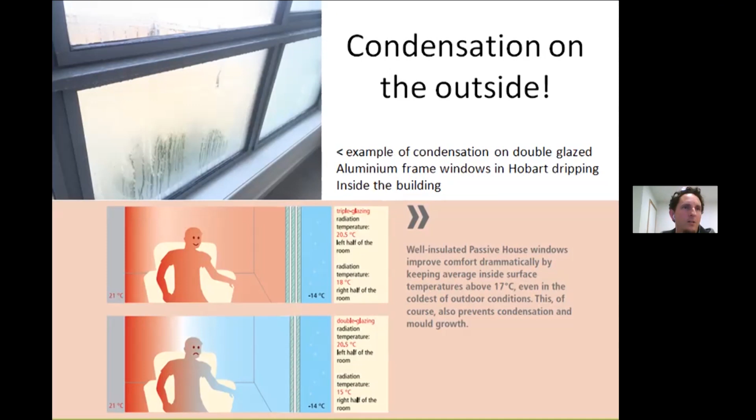It's actually one of Justin's previous houses to build: dripping condensation on double glazing with a non-thermally broken aluminium frame. And this will lead to mold and then respiratory illness, all those things that we know about from the New Zealand case studies. And you'll get uneven temperatures. So this double glazed panel will be cold, and you'll get this unevenness, you'll feel draftiness and cold. That will not happen in a passive house. It goes right into the detail, even if you look at this, it's quite interesting.

So this is pretty much my last slide actually before we go to questions. We're just bang on an hour.

An aluminium spacer on double glazing. And look at the outside temperature, minus 10, 20 C inside. So that's the case for all these different windows. This is just showing you how important detail is in the passive house system. So with an aluminium spacer, you get condensate.

And you can see the actual conductivity value of that edge spacer. So we're getting down to a detail of talking about the spacer that separates double glazing and how to specify that. Stainless steel spacers in a triple glazed window still create a thermal bridge through here, and you get condensation. That's a very efficient window frame. Timber with aluminium cladding, a good triple glazed window with a poor performing edge spacer. Even a slightly better one and still getting mold.

Then when you actually do what's called a Swiss spacer or an insulated edge spacer, which has a much better conductivity value, lower being better R value effectively, you don't get any mold, any condensation. So these are the sort of details that are going to be considered in a passive house.

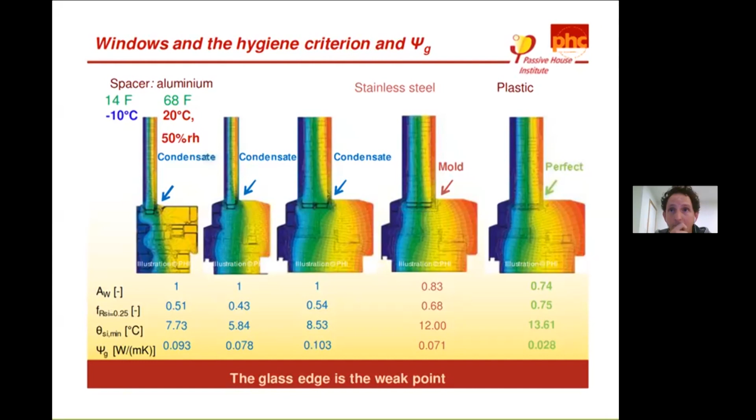So I might just finish with a few acknowledgements. And these are useful for when this video goes online so that people can contact the different people involved in the project. So Justin O'Connor was the builder and still is. And I highly recommend him. He's just been amazing and does an incredible job, super quality conscious, very knowledgeable, and just a great planner. And considering it was his first build with CLT, he just did an incredible job.

People that are interested in mass timber construction for different projects, there's a free service called Wood Solutions, and Paolo, I mentioned him earlier, he's the Italian CLT engineer. You can speak to him at woodsolutions.com.au. They provide free advice when you're interested in doing a mass timber building, like a CLT construction.

In Tassie, we use Paul Clayway from Building Evaluate to do the energy ratings, the star ratings. This building had over a 9-star rating, but I guess that's not really important other than giving us an indication of performance. What was really important is the modeling. But Paul also does blower door tests and has a thermal imaging camera and has a broad range of knowledge and expertise. So we really value his input in the design and refinement of the design.